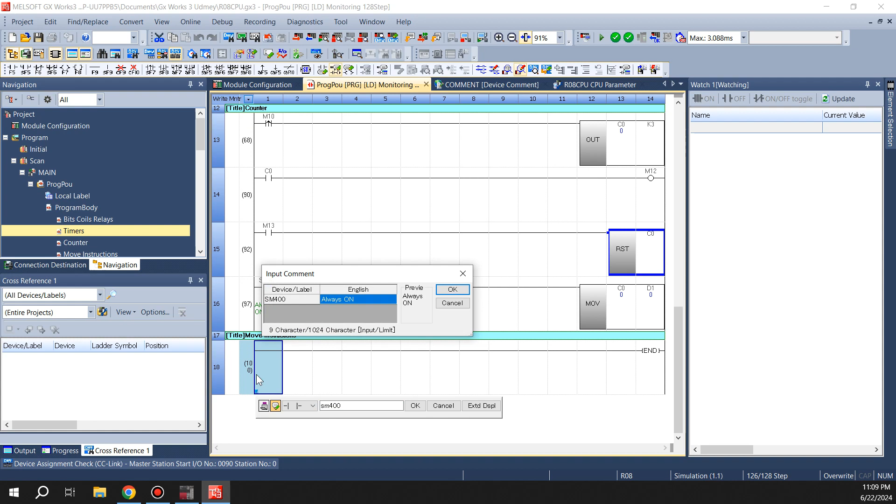In this lecture, we'll go over how to use MOVs, DMOVs, BMOVs, and FMOVs in GX Works 3. So we'll start with the basic one, which is a move instruction, and we'll put an SM400 because you need something in front of an instruction to execute, and then we'll do move D2 to D3. What this would do is move 16-bit of D2 into D3.

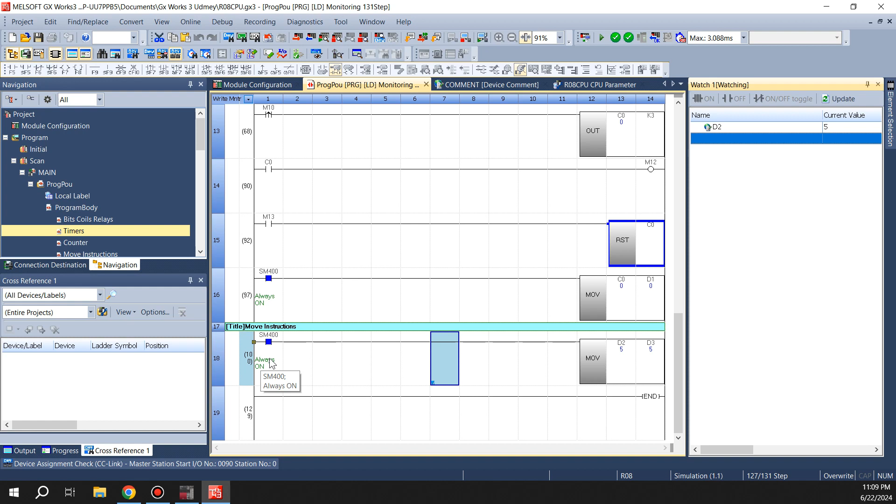And if we download the changes and say yes, changes are done, and as you can see, whatever is in D2 is in D3. So we'll bring up D2 in our watch and put 5 in there, and we should see a 5. So that's how move works. It only moves 16 bits, or 2 bytes, or 1 word into the specified word.

Now we'll just disable it and we'll use a double move instruction. It's called double move because you would move 2 registers, and you need to make sure your next register is after the occupied space. So D2 double move would move 2 words starting from the first word, so D2 to D3, and it would move it to D4 to D5.

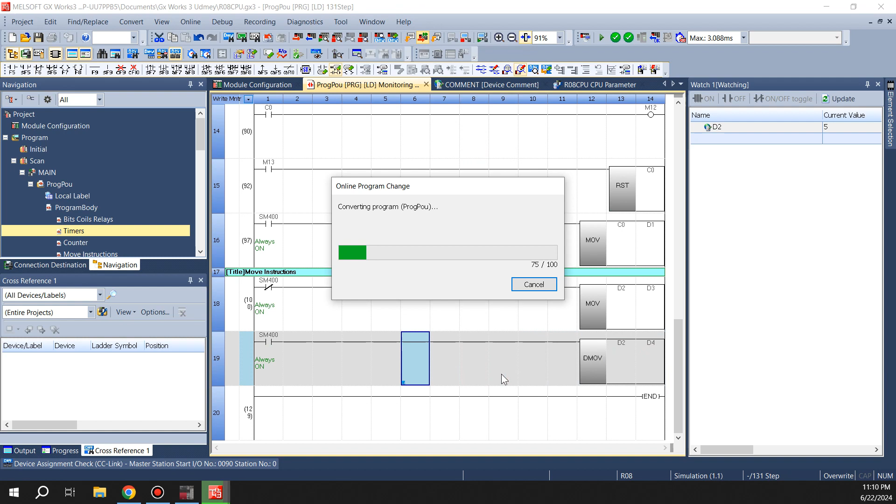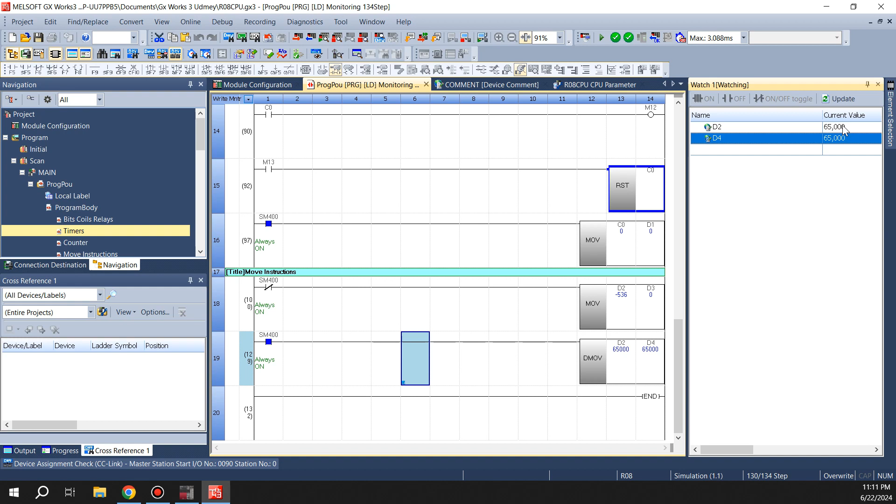We'll download the changes, and now if I bring in D2 and D4, also in the watch window you can change the type. So instead of word, we'll do a double word. So if I put in 25, you would see 25. If I put in 65,000, it would put a 65,000. So that's how a double move works. It's pretty simple. Now we'll do an F move.

With F move, it would transfer 16 bits of block data and fill up with a constant. So if I want to clean up, in our case, D2, D3, D4, and D5, I do an F move D2, and my constant would be K0, but I need to specify the length. So that would be 2, 3, 4, and 5. So length of 4 and fill with K0. I think I missed something. D2, K0 for the length of K4. Let's try it again.

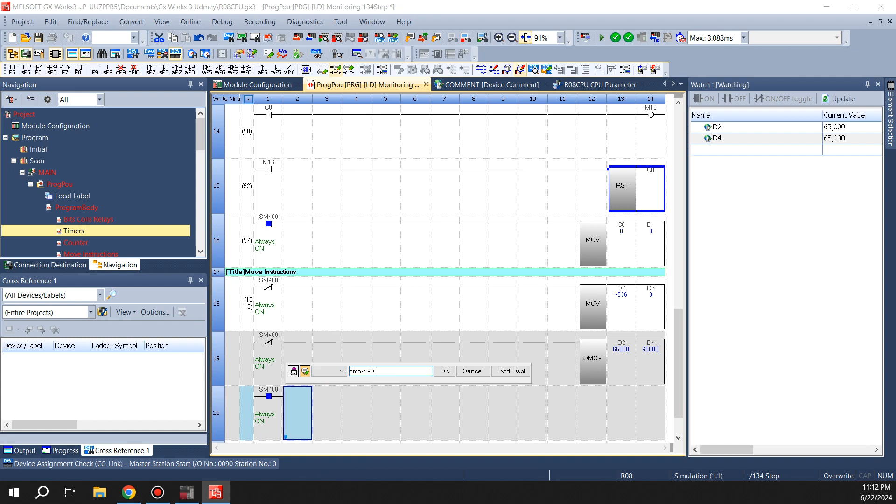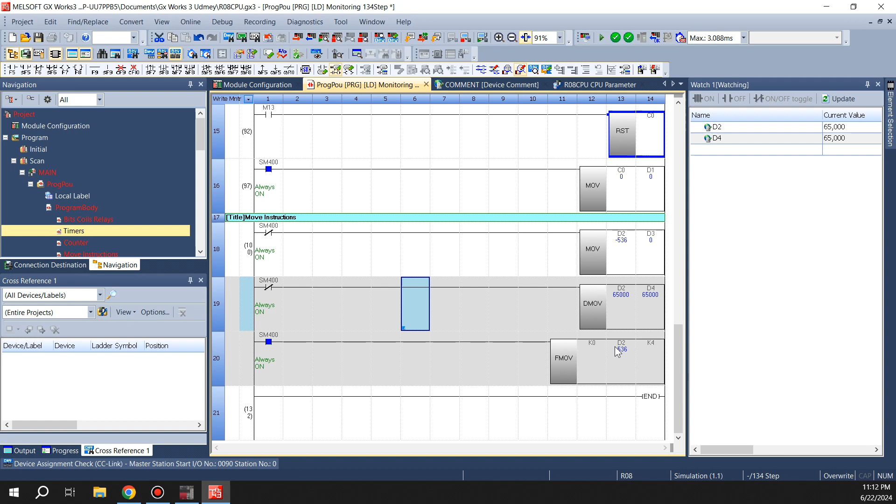Okay, the only thing I had incorrect was my K0 has to be in front, so the constant you're trying to fill in with needs to be in the front. And in the middle would be the memory area where you want to start filling 0, and K4 is the length, so it's going to fill 0 from D2, 3, 4, 5. As soon as I send this, all these would be 0. And there you go. All of those are 0 now. Now we'll turn it off.

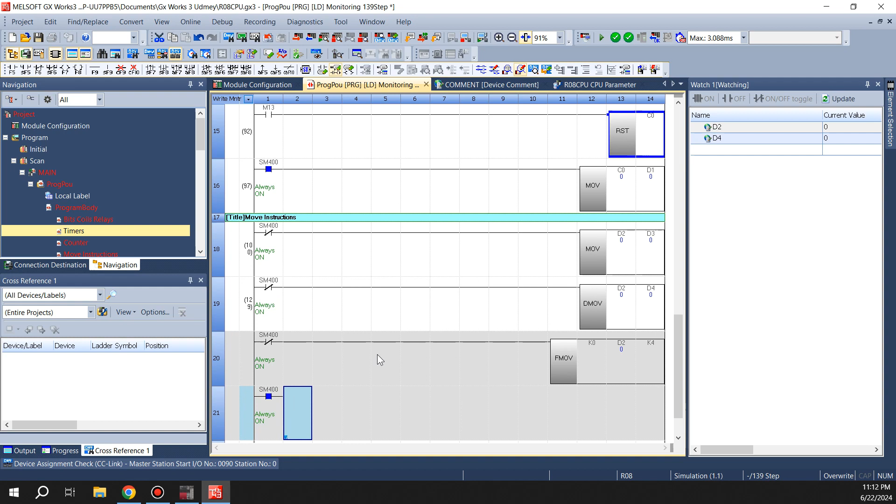Now we'll do a block move. As the name specifies, block move is basically a bigger version of DMOV. You can specify a length of block, so you could do blocks of 5, 10, 15, 2, 4, whatever you want. You just tell the length of the block, and you can move the whole chunk of data from one set of memory to the other. It's really useful when you're moving part information from one station to the other. You would do a block move, and you'd move all the stuff that is related to the part.

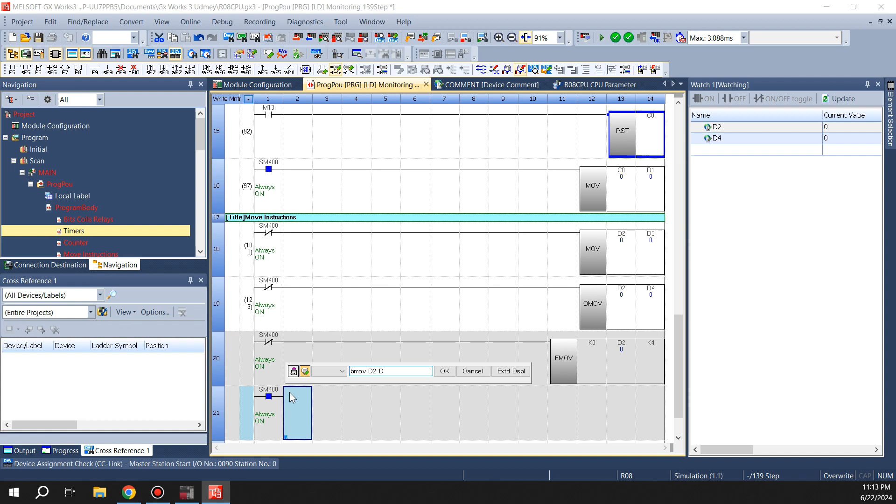So if you do a block move, we'll do D2 to D12 for a length of 10. So here it's going to move D2 into D12 for a length of 10. That means D2 to D11 would be moved to D12.

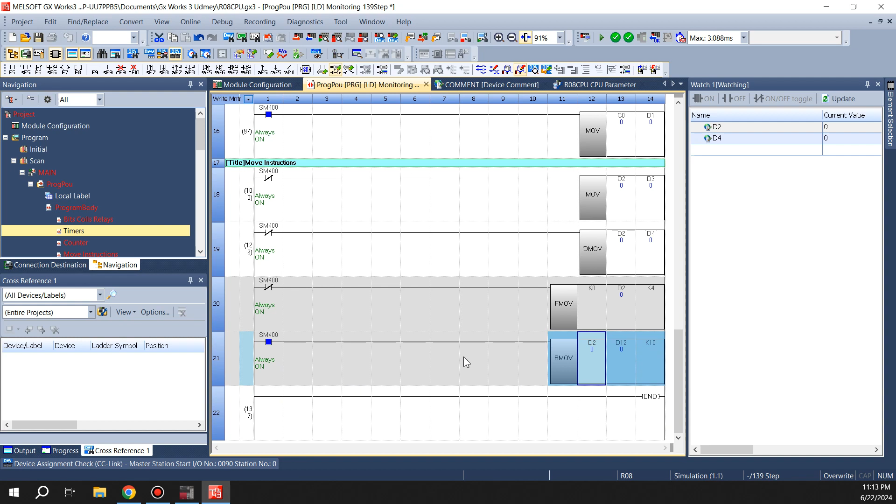Now keep in mind, it does not clear out D2. Everything in D2 still stays. So if you want to clear out D2, then you would have to either do an F move underneath it, so it clears out D2 after the move, or you do a swap. With the swap function, it basically swaps the memory information between the registers for the length.

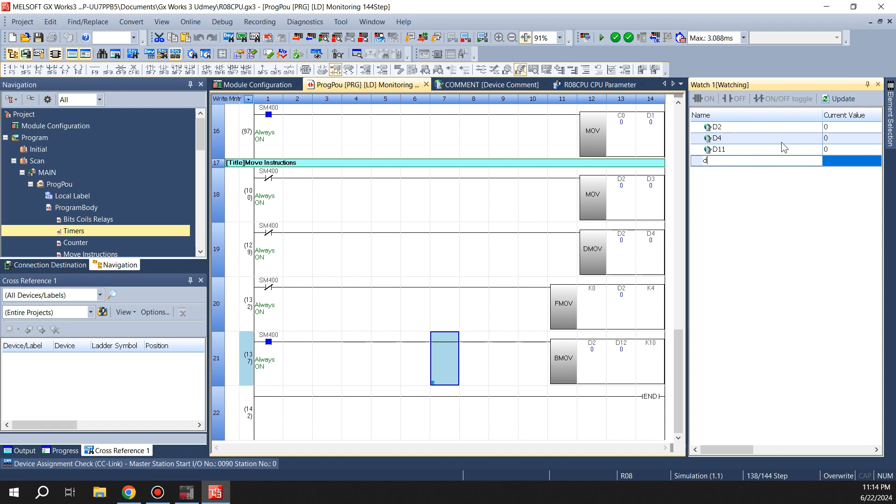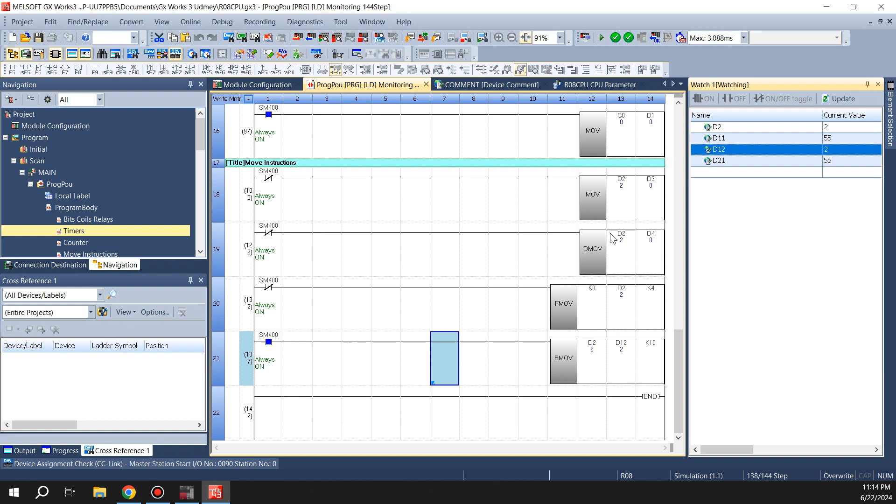So here we'll bring in D12, D11 and D21 on the watch. We have D2, I want to have a D12 so you can see. Okay, there we go. So if I put a 2 here, you're going to see 2 in 12, and if I put a 55, I'm going to see 55 in 21. That means it's moving everything between D2 and D11 to D12 through D21. So that's how a block move works. We'll zero that out or turn it off.

And the next one would be EMOV, which is used when you're trying to move real numbers. An EMOV is basically moving a single precision real number. It's still a double move, but typing in E would at least help the other guy know that this is a real number, and you could also see the value in real format. So let's try it out. We will do an EMOV D2 to D4.

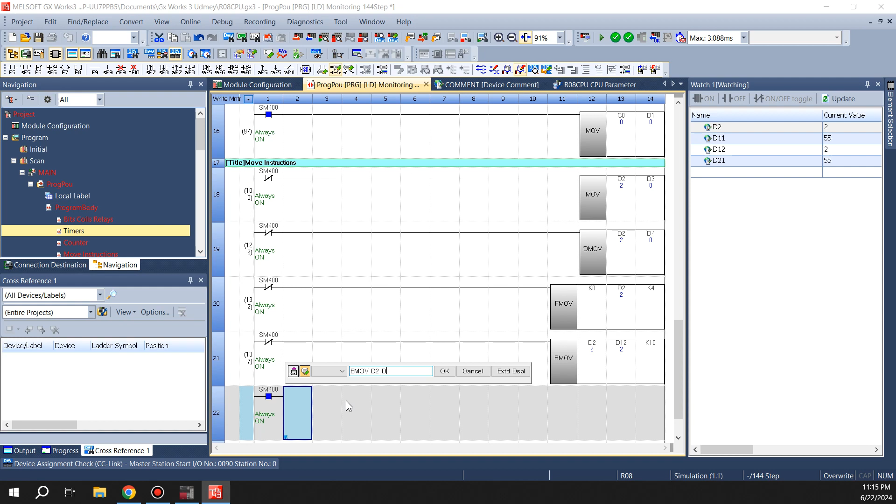If you see, when I did an EMOV, my value in D2 and whatever is in D3 made up a real, and it's showing up here. We'll send it, and we'll put a value that we can recognize. Since I have D2 up here, all I have to do is change the data type to a floating single, and I'll put a minus 2.5. There we go. It moved minus 2.5 to D4.

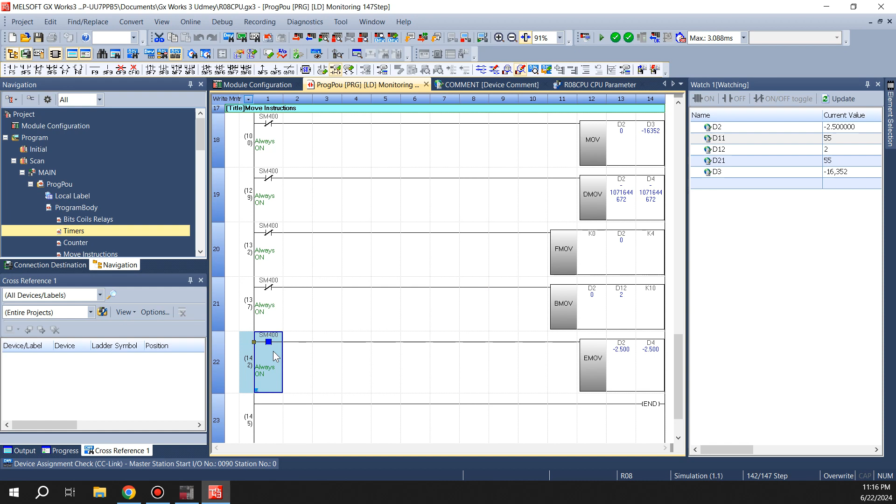So that's all about the moves in Mitsubishi. There are a bunch of other moves that you can use, and you can swap stuff. There are byte moves as well, and things related to strings, which we'll go over in the next couple of lectures.